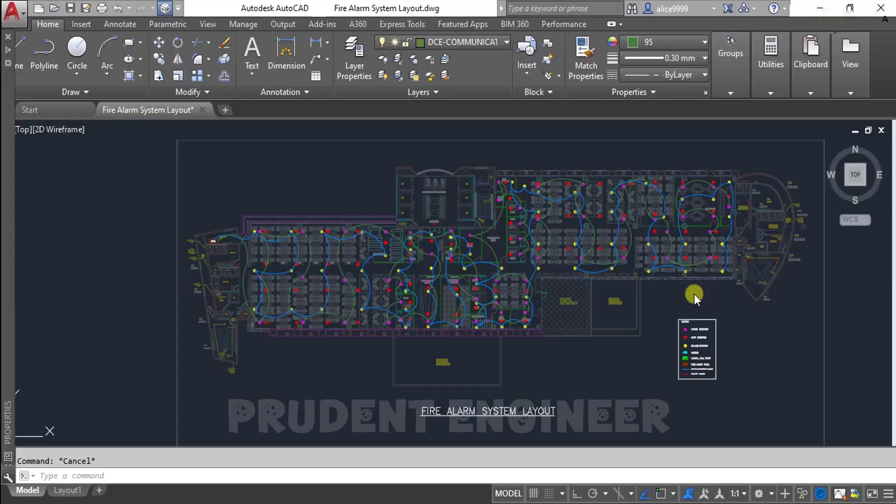So this is how we connect the smoke detectors and ceiling speakers with communication cable. Now we will try to connect the heat detectors with the communication cable, and it goes to the fire alarm panel, fire alarm and public addressable panel.

So here I will make the layer for the communication cable for heat detector.

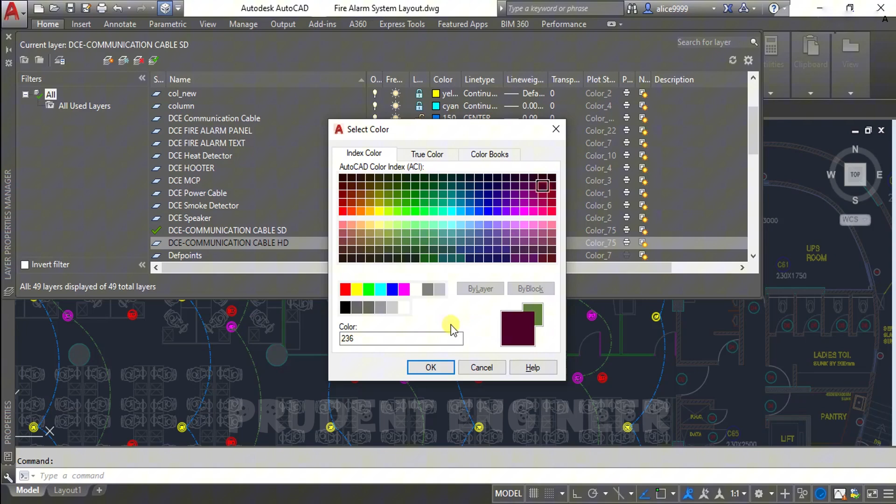And choose the color randomly, which is differentiated from the smoke detector's communication cable and the speaker's communication cable. I will select this color, which is differentiated from the smoke detectors and the speaker's cable.

So here is the communication cable. I will make the layer for that, the current layer, and try to install the communication cable, or try to connect the communication cable with the heat detector.

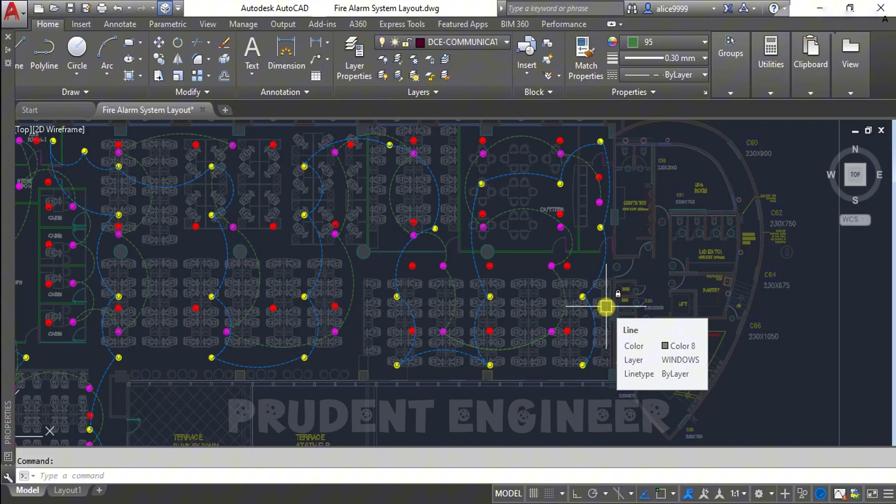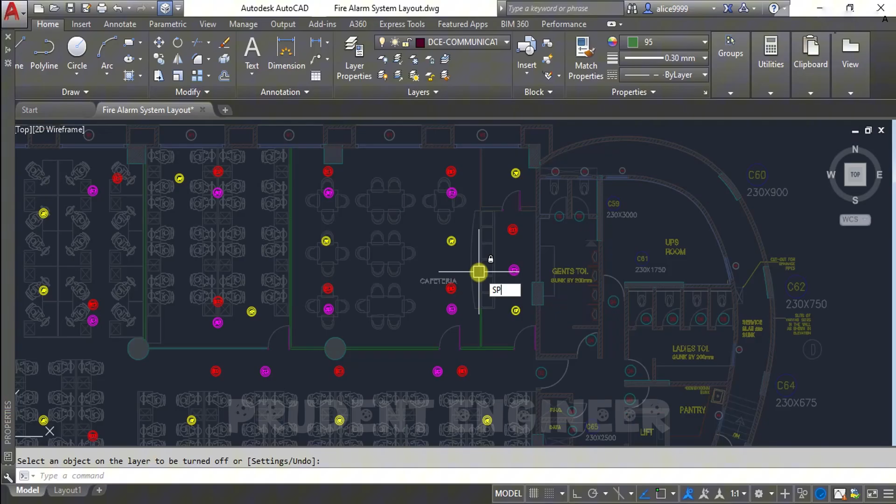For that, I need to turn off these two layers, that is speaker's communication cable and the smoke detector communication cable. Then only I will put the communication cable for the heat detector. For that, I will start from here, like this.

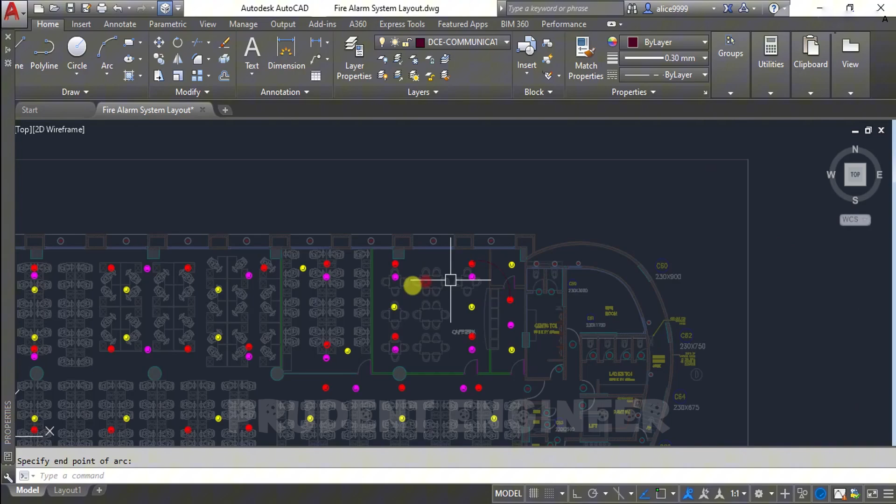Here it is, the heat detector cable, communication cable, like this. Try to keep the looping for heat detector communication cable like this. As this is very important, keep the looping.

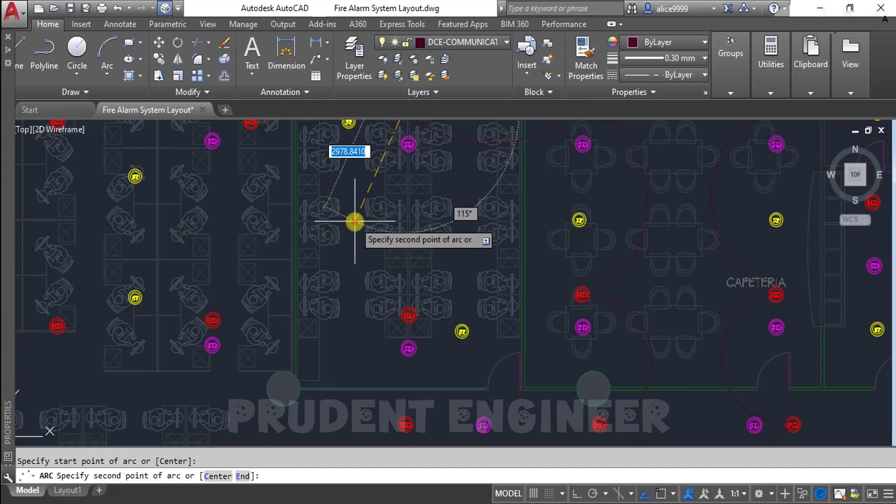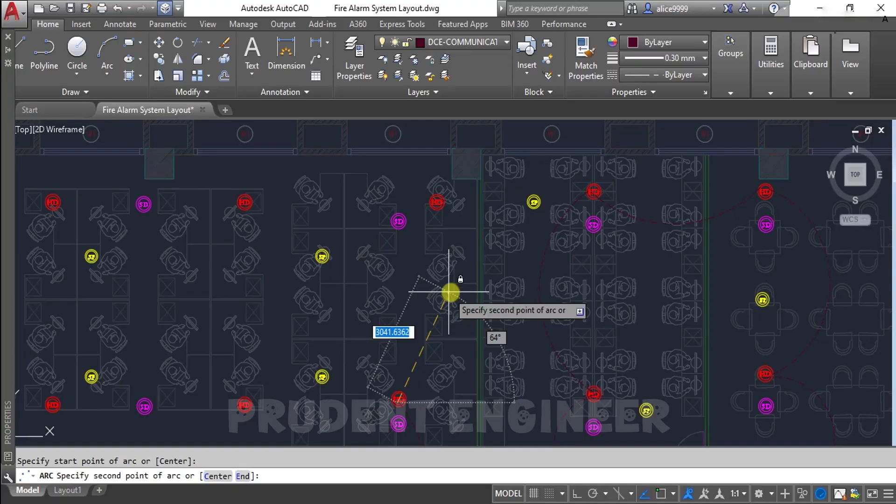Each heat detector must be connected with the communication cable like this. Try to connect each and every heat detector with the communication cable, like this, like this.

This is what I am doing, connecting the heat detectors with the communication cable. Try to connect each and every heat detector with the communication cable. Here it is, like this.

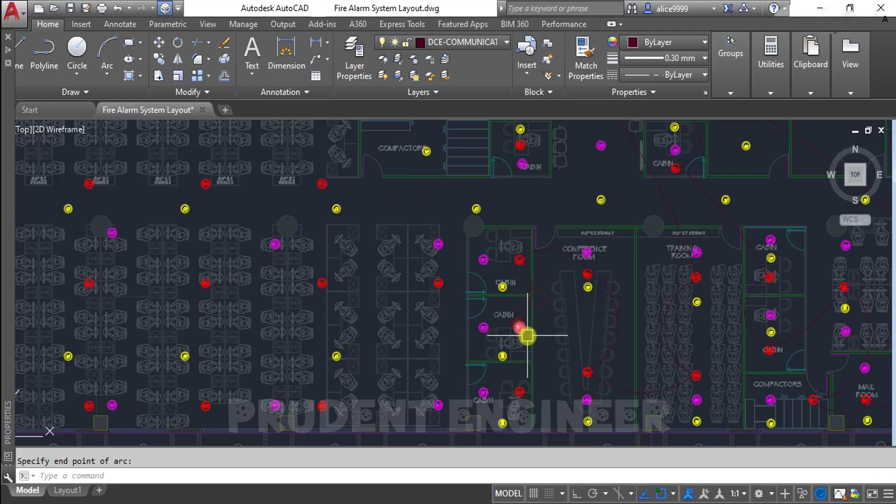Distance must be covered minimum, like this. Each and every heat detector connected with a communication cable, like this.

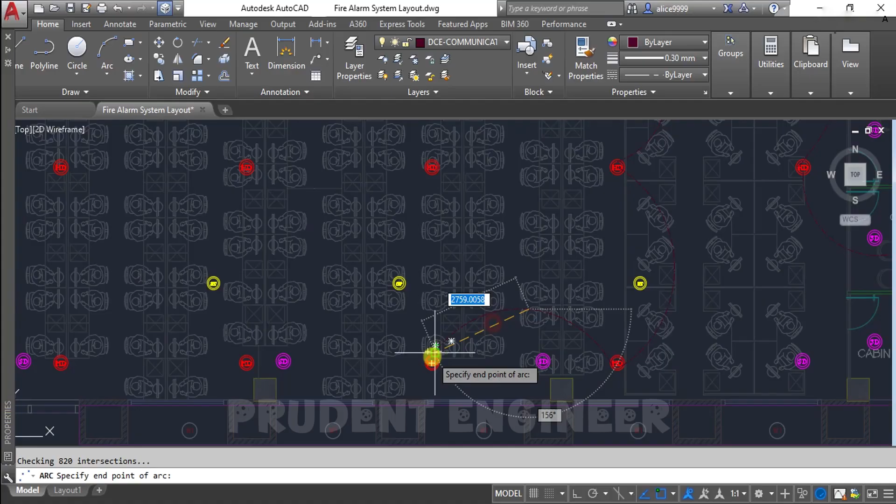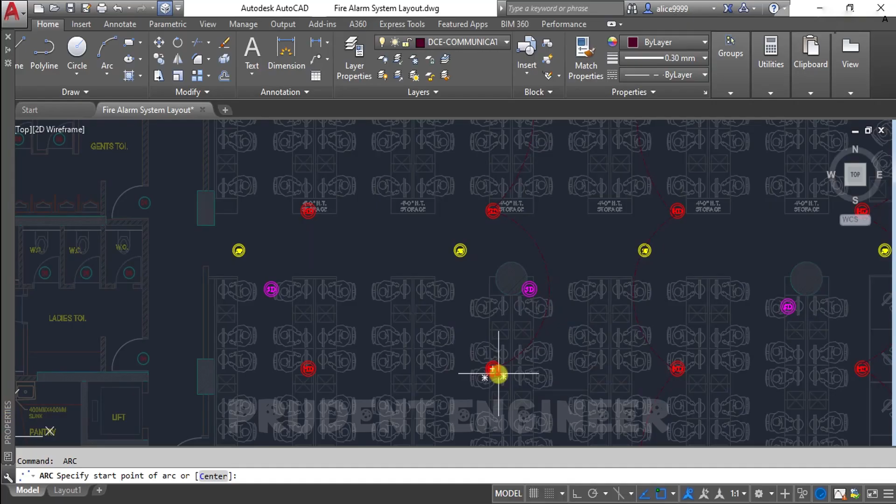Try to keep the heat detectors connected with each cable.

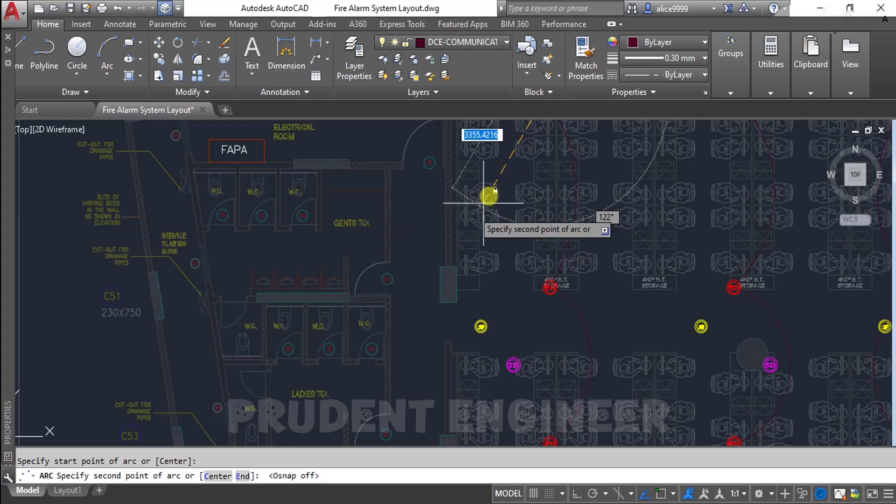Try to loop the cable with each and every heat detector, and then we can go here into the fire alarm panel. So be assured that each heat detector has been connected with the communication cable.

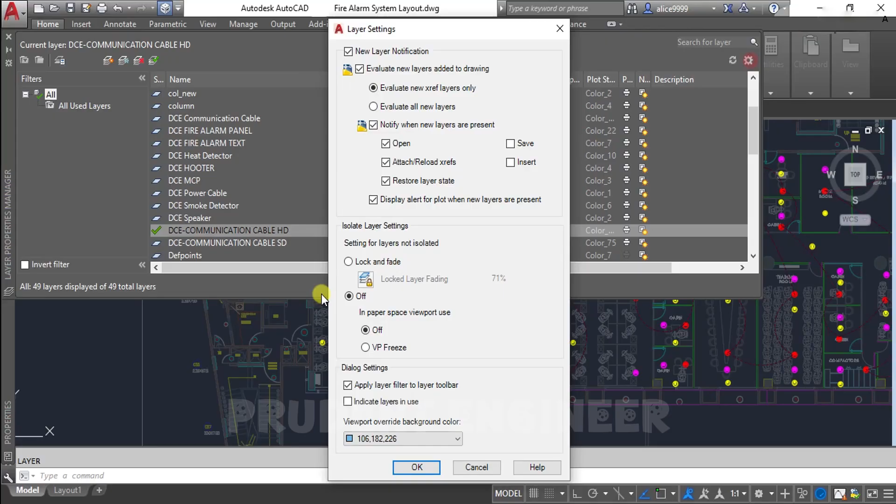For that, I will do the simple way: isolation command, lock and fade command, and the off command. Into the off command, only the isolated layer we can see, like this. So is it that I connected each and every heat detector with the communication cable?

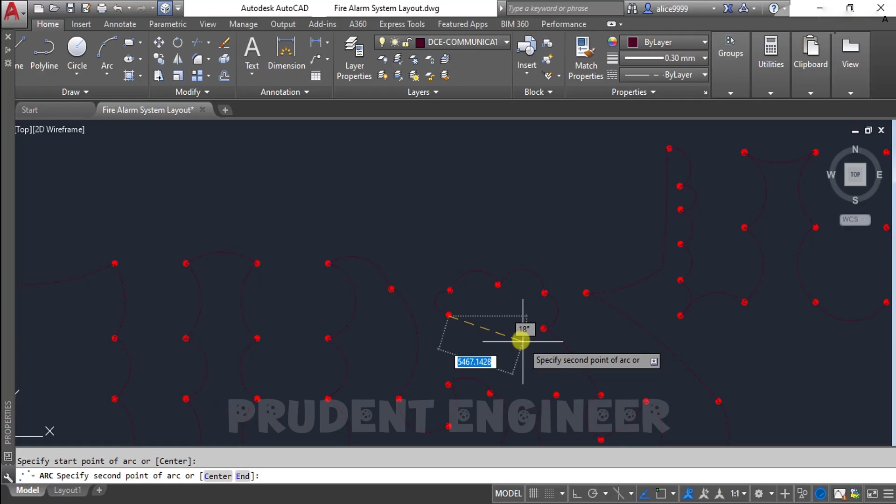No, here it is, I missed two heat detectors, so I will connect like this. So here, again, there is one more heat detector I have missed. So here I have connected each and every heat detector with the communication cable.

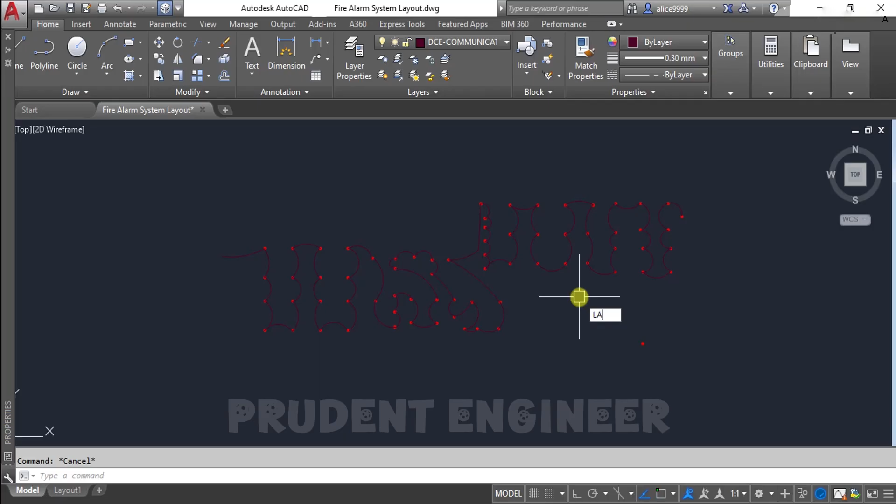So what I will do, I will make an ISO and see, this is each and every device has been connected with the communication cable. Each device has a separate communication cable going to the fire alarm panel.

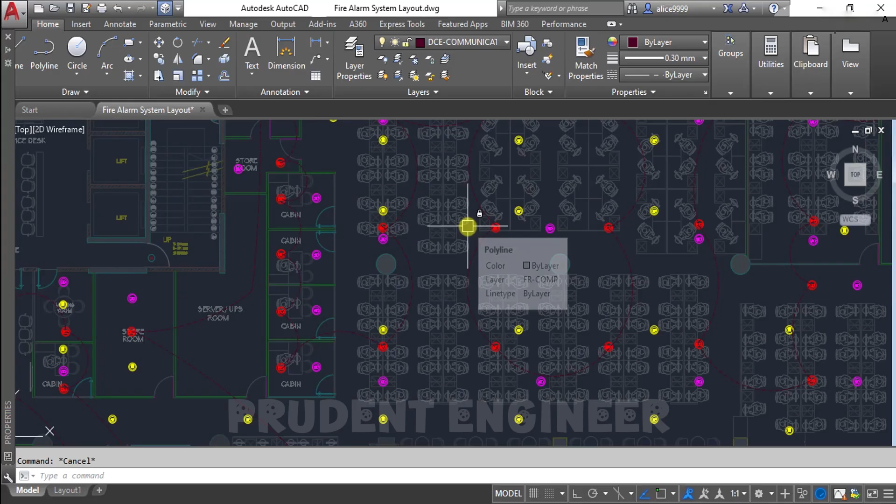So this is the communication cable. Now you can see each device has been connected with the communication cable.

Same we can draw with the power cable. Each device connected with a power cable, and that cable going to the DB, distribution board. MCB required for these devices.

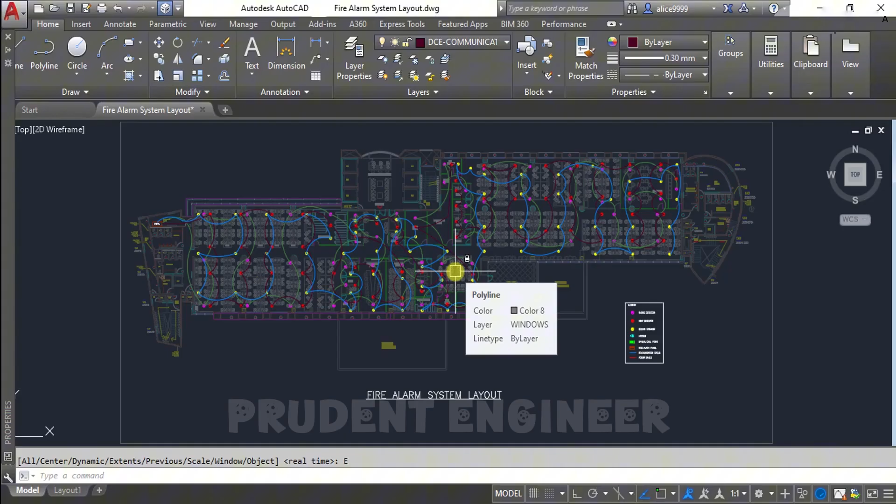That is in a single line diagram we can see, we can show, but not in this diagram. This diagram is specially for a fire alarm system layout.

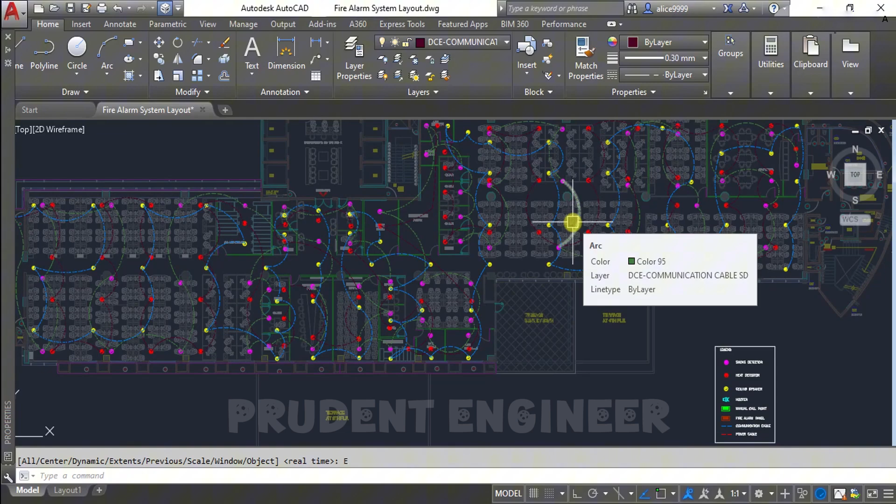So in the fire alarm system layout, I have installed the smoke detectors, heat detectors, ceiling speakers in the area, and connected each and every device with the communication cable, and all that communication cable going into the fire alarm and public addressable panel.

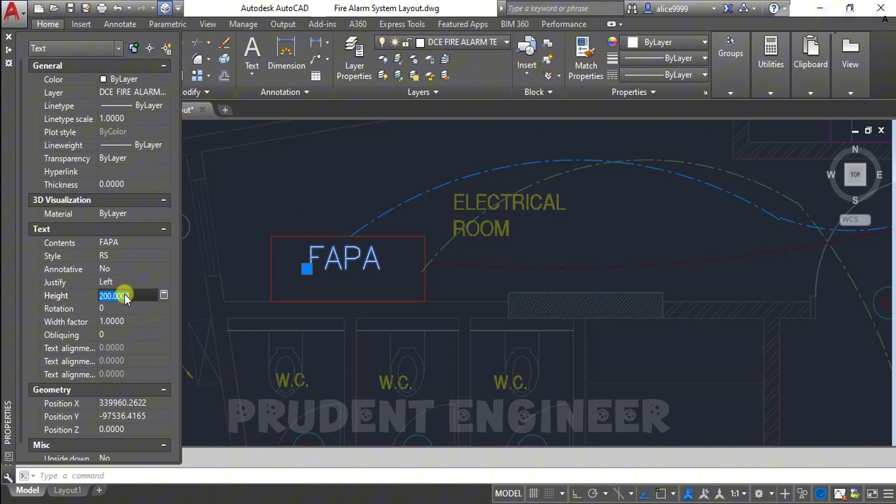So this is FACP panel. This is called FACP panel. This panel is connected with each and every cable. So I will mention over here the FACP panel, or it is also called FAPA panel, meaning the fire alarm and public addressable panel.

So this is the unique location for this FACP panel, and each and every device has been connected with the fire alarm and public addressable panel.

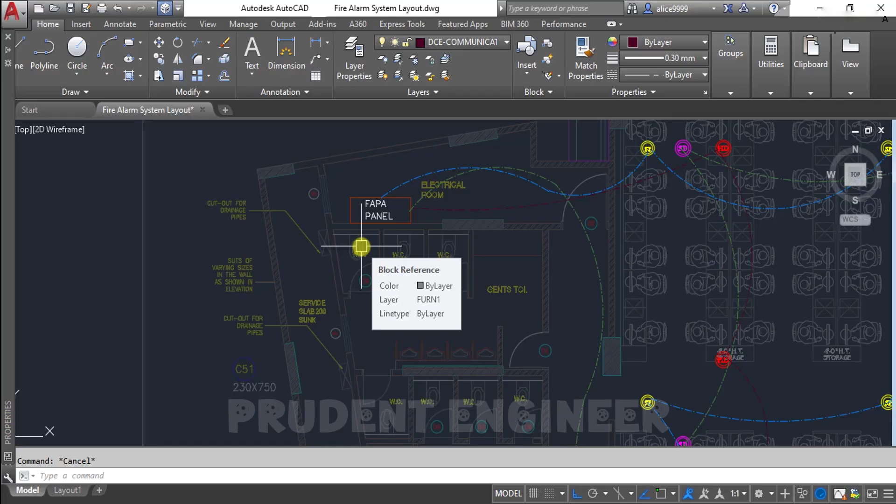So the next is Hooter. Hooter is a very important apparatus, the device which connects with the fire alarm panel at the assembly area. This Hooter is required to install at the assembly area.

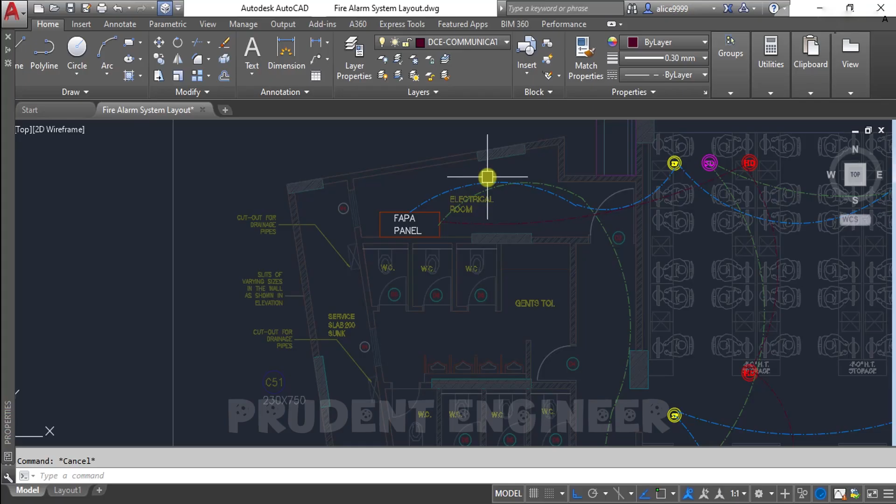So we need to understand where the assembly area is. In case of fire, the entrance is here, and this is the customer desk, customer service desk, or it is also called the assembly area. The assembly area is near your staircase, because in case of fire, we need to use the staircase instead of the lift.

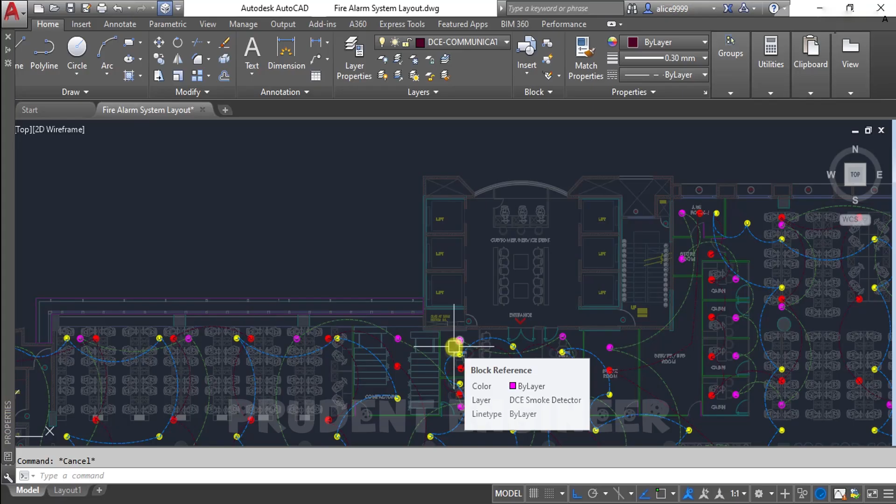So at the entrance area, there is the assembly area, and in the assembly area, we must install the hooters as well as the manual call point.